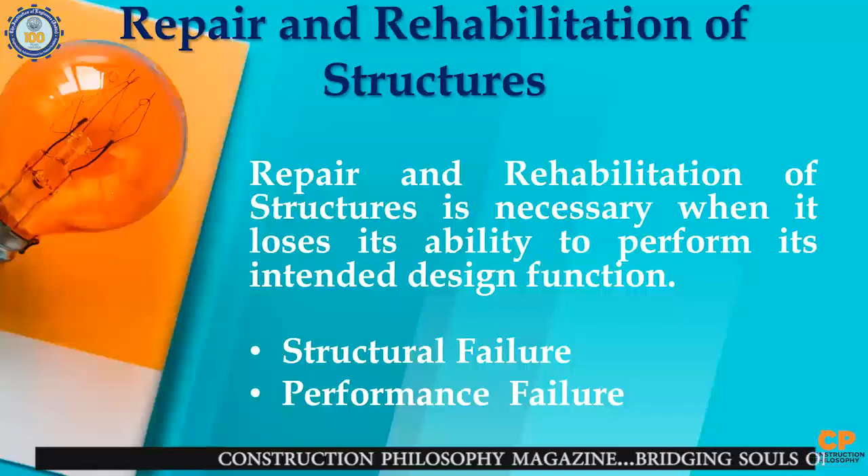Now today we are talking about the cases of evaluation of distress and remedies. These are very small things, but small things make a big difference in the real field of practice. So repair and rehabilitation of structures is necessary when it loses its ability to perform its intended design function. There are two major aspects which happen: one is structural failure, and second is performance failure.

What are the reasons which contribute to these failures? One, externally applied load. Your building might have been designed for a particular purpose, maybe a residential area, and later it will be converted into a storage space. So it is an externally applied load which is not taken into consideration. Then environmental loads: earthquake, wind, and other things.

Accidents like the case yesterday where the blast was talked about, the blast of an LNG, was explained by Surya Prakash yesterday. Accidents do happen. Error in design and detailing also adds to a major aspect, because at certain times we have a lot of factor of safety, which is why we need a proper system of checking or peer review, which has to come into practice, but is not there in our country in general.

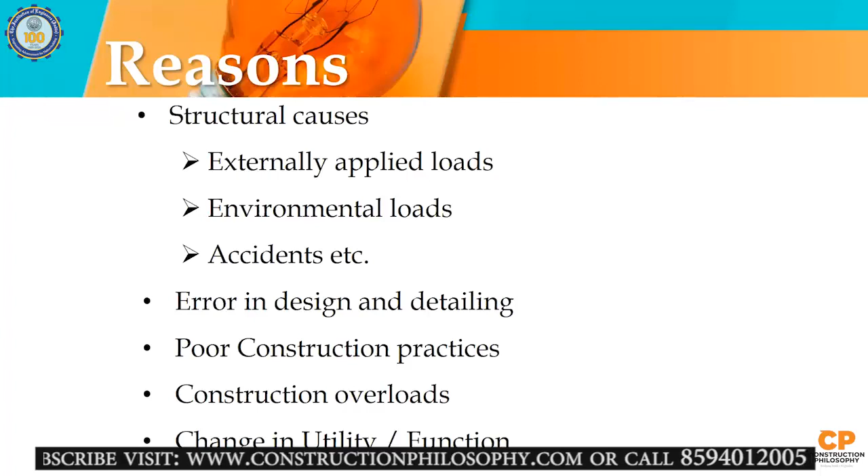That is where yesterday Surya Prakash was pointing out the need of having the Professional Engineers Bill in the parliament, and engineers should be made accountable for the work they are doing. Then there is poor construction practices and construction overloads, which I was talking about, and change in utility of function. So these are the reasons which lead to the distresses happening in structures.

So a structure needs to achieve its required strength so that it can be put into service without compromising its safety and utility.

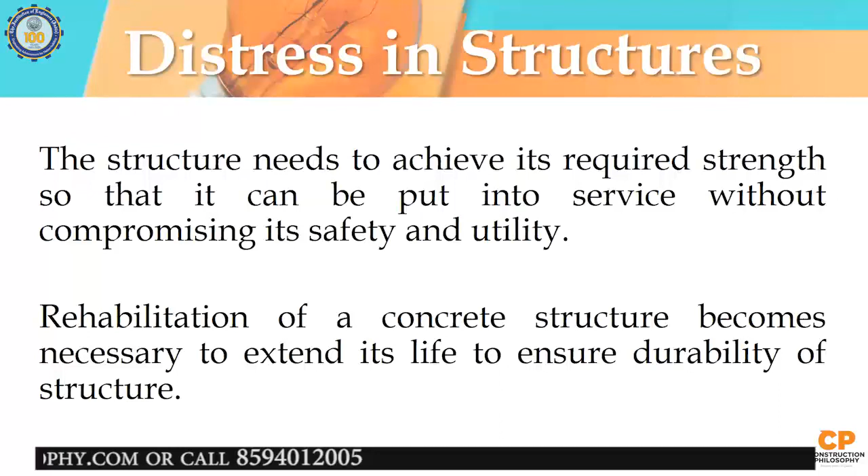Rehabilitation of a concrete structure becomes necessary to extend its life to ensure durability of the structure. Now, how do we understand that a building is easy to notice collapse of the structure in certain cases, like what happened in the auditorium which Suresh was talking about, non-occurring of required strength of structural elements, etc. So these are the reasons which lead to distress of the structures.

And how do we analytically evaluate a distressed structure? These are the steps to evaluate and rehabilitate the distress in a building. First, physical inspection of the damaged structure has to be done, presentation and documenting the damage, collection of samples and carrying out tests both in situ and in the lab, studying the documents including the structural aspects, estimation of loads acting on the structure.

Estimation of environmental effects including soil structure interaction. Then we have to diagnose the reason, find out the root cause, and take preventive steps not to cause further damage. Then retrospective analysis to get the diagnosis confirmed, assessment of structural adequacy, estimation of future use, and remedial measures necessary to strengthen and repair the structure.

Post repair evaluation through testing - yes, testing has to be done after evaluation. Load test to study the behavior, then choice of course of action for the restoration of structure. So these are the step-by-step process when there is a problem which is happening or which is likely to come up in your project. This is the way you have to take the step-by-step process.

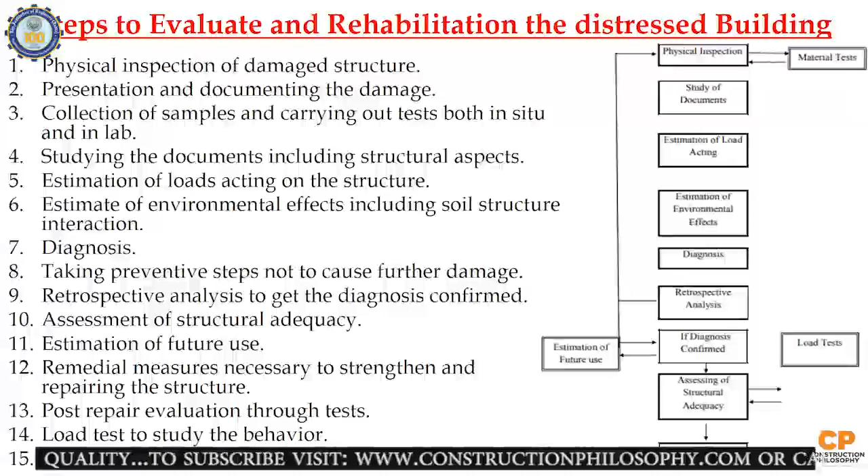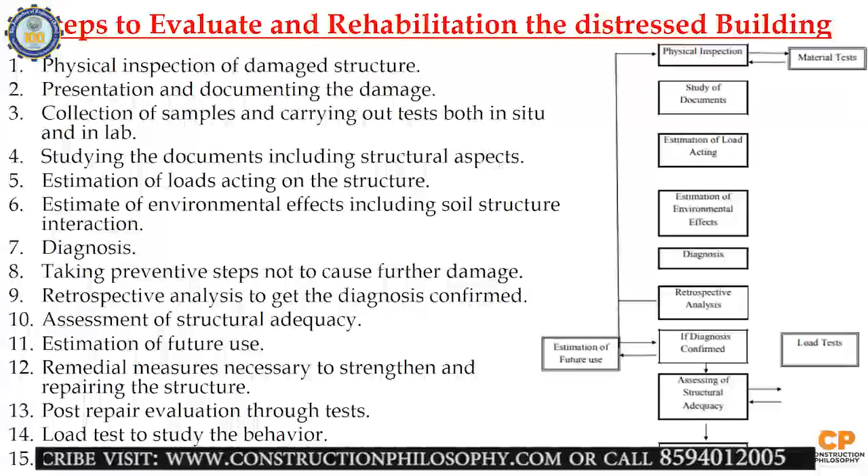There is a flow chart also shown on the other side: physical inspection, study of material test, study of document, estimation of load acting, estimation of environmental factors, diagnosis, retrospective analysis. If diagnosis confirmed, estimation of future use, assessment of structural adequacy, load test, and choice of course of action. So that is the different procedure which we adopt to find out the systematic approach.

And documentation is a big important step which generally we lack. That is very essential, and it is very essential for the government authority also to keep necessary documentation with them, so that in the eventuality something happens to a building - and generally it happens after many years of its construction - there should be some dependable document they can rely upon to make sure the problem is identified and correction is made. It is more important because the safety of public is in question. So our system has to improve to reach up to that level.

So today I am talking about 3 cases which I told: one is the IT building at Kakkanad, a hotel building at Kottayam, and a flyover at Cochin.

The reward for being a good problem solver is to be heaped with more and more difficult problems to solve. This is by Buckminster Fuller, and it's a very important thing. And again, it becomes a passion in you.

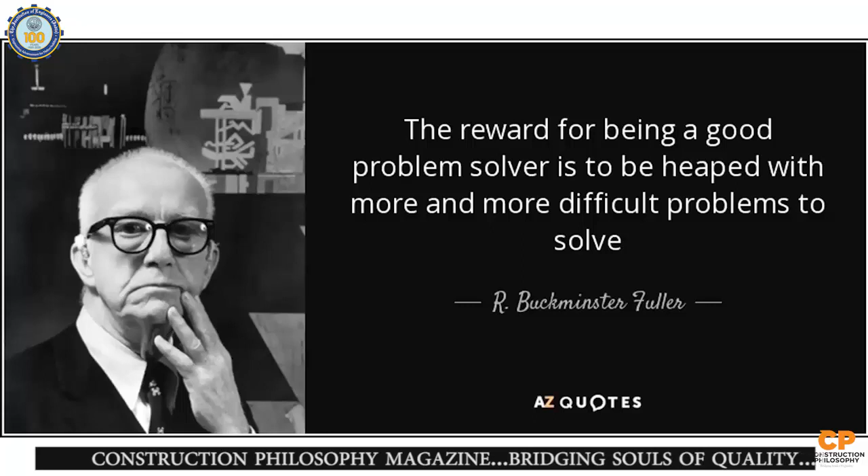Then you jump into the problem to understand what has gone wrong. So a good engineer should have the engineering skill and the curiosity in him to understand what went wrong, or how it can be attained, and how our knowledge can be put into practice.

So this case one which I was talking about comprises an IT building, basement plus ground plus 19 floor building. And ground floor - these are the details, what are the floor heights, which I'm not talking about. My problem was that the cube strength value for the 28th day compressive strength for 19 columns in my ground floor and first floor level needed M45 grade concrete, because this is a huge building with column spans of 10 meter by 10 meter interval. And since the grade of concrete designed was M45 grade, it was not achieving the required strength.

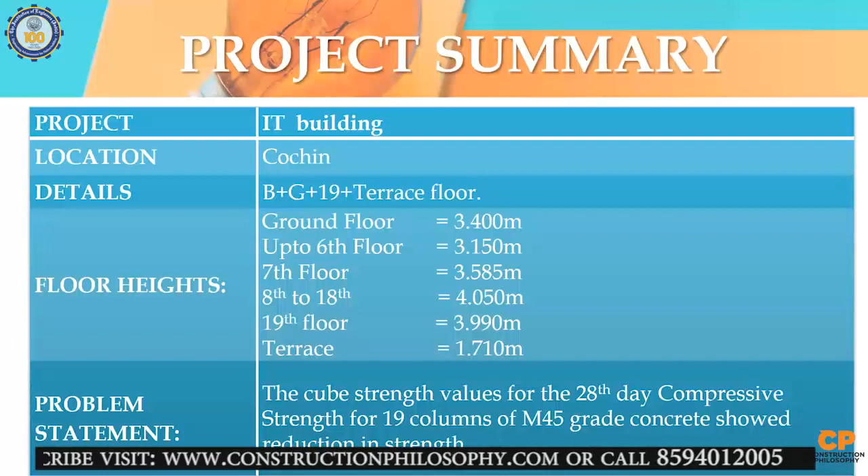Quite a normal problem which many of you generally get in your day-to-day practice, or somebody connected to the site will know this sort of issue generally does come. So what do you do generally for that? This is the project which is completed and functioning now.

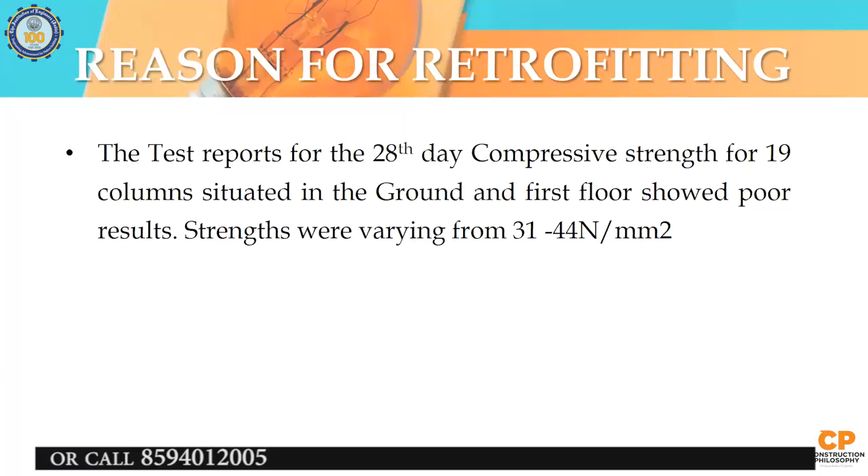My strengths were going for the 19 columns in the range of the cube strength. So how do we take the cube strength? We take cubes during the concreting and work out the 3-day strength, 7-day strength and 28-day strength. Certain times we skip the 3-day strength and go for 7 days and 28 days strength, and it has to be more than what is required, but here it was not coming. So what should we do for that? We decided maybe something had gone wrong with the cube making, and cube making is also a very important essential thing.

Many site engineers make sure that your cement will be best, your sand will be best, metal, everything including the water is the best possible, but your mixing procedure is a very important aspect. Again, you might have a very good concrete team who is doing the job perfectly, but the man who is taking the cube, if he doesn't know how to take the cube properly, we end up with a big problem.

That needs to be attended to. One thing we generally lack is good concrete engineers in the industry. We are always struggling with the grade of concrete, starting in the initial phase of the career to get M20 from M15, then M25, M30, and within 1996-97 we started going to M30, M35, then moved to M40. M40 was stuck there for quite a long time, and now we moved into 45, 50, 55, 60, and currently in Cochin we are doing a couple of projects at M60 grade concrete. Still we are able to achieve up to M80 grade concrete.

Whereas if you go abroad, people are using 100 grade concrete, 120 grade concrete. Why? As the compressive strength capacity increases, your size of column can be reduced, your steel can be reduced, economy can be achieved. So now there is a lot of technology which brings in high strength concrete. That's a totally different topic which I am not going to touch upon today, but I am worried about what is going wrong in our concrete at site, and if something goes wrong, how to manage that.

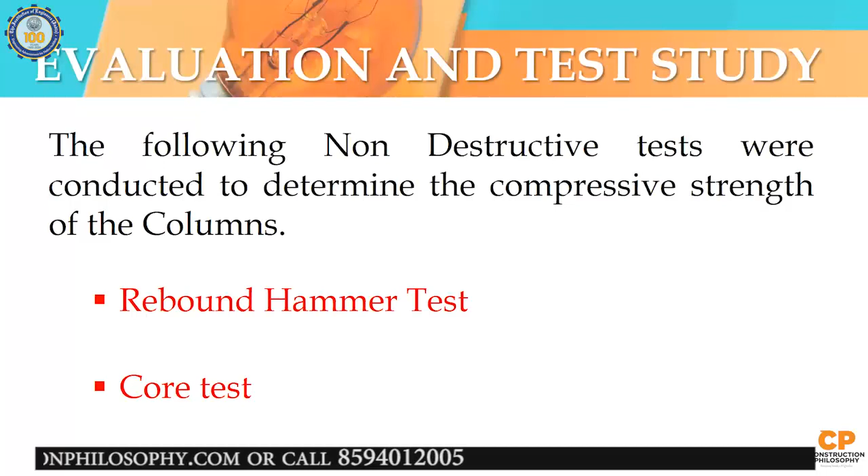So the following non-destructive tests were conducted to determine the compressive strength of the column. We went for rebound hammer test, and to confirm the values we went for core testing. It was a very critical project, the loads were important, so we didn't want to take chances. This was the non-destructive test which was carried out.

Rebound hammer test conducted on RCC column showed that the estimated strength of the concrete in the RCC column member, after necessary correction, is varying in the range of 31 to 44 Newton per mm square.

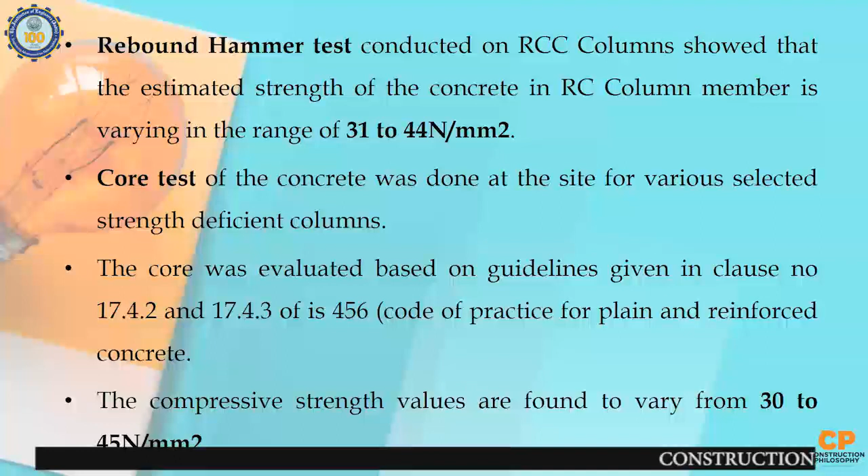Again we went for core testing. Core testing is something which, if you are getting it done, be very careful because it is very essential that the core is taken properly. Core test of the concrete was done at the site for various selected strength deficient columns, and the core was evaluated based on the guidelines given in the clause of IS 456, and compressive strength values are found to vary from 30 to 45 Newton per mm square.

So we have a problem there, and how to go about strengthening the column - what can be the reason? A lot of study, a lot of arguments on how to find out, and I should remind you that the project was executed by one of the biggest contractors in India, and the quality control was done by an internationally acclaimed PMC.

So again, low quality aggregate for concrete was suspected. Fly ash based cement - the type of cement was changed, and the testing was redone. Low quality of workmanship, every point including the point where the loading was happening, was checked and cross-verified. Nominal size of aggregate mismatched with that of mix design at the time of casting - that was also cross-verified.

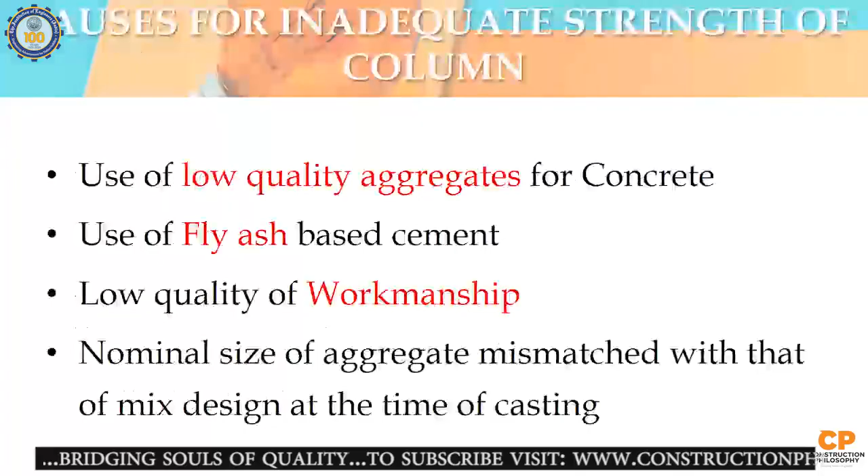And there we had to come up with a solution. So all these trial and error tests were done. We were trying to get the batching done, and trial cubes were made, but we were not able to come out of the problem. Now, what are the solutions possible?

One, demolition of the columns which have not attained the required strength and recast the member wherever possible. But unfortunately, by the time the 28 days strength comes in, your building has gone up another 2 or 3 floors in height. So there is a problem - by the time you come to a decision, there is already a loading on top of that.

Then you can retrofit using carbon wrapping, or there are n number of systems available - steel bonding, plate bonding, etc., and go for column jacketing. Since in many cases, especially on big projects, as a structural engineer, I insist on demolishing the column, because once you get the column demolished, especially if it is a main contractor, he will be careful throughout the remaining part of the project. If you allow them to do some quick solutions, then it will be a big problem later on.

I have experience on very tall buildings, say 30 to 35 floor buildings, where we made sure that the column is dismantled even if there is a considerable degree of damage or honeycombing. We generally won't allow them to get away with pressure grouting or carbon wrapping or other things. But on the upper floors, where it is difficult to get done and the loss of strength is not very critical, sometimes we go for retrofitting using carbon wrapping.

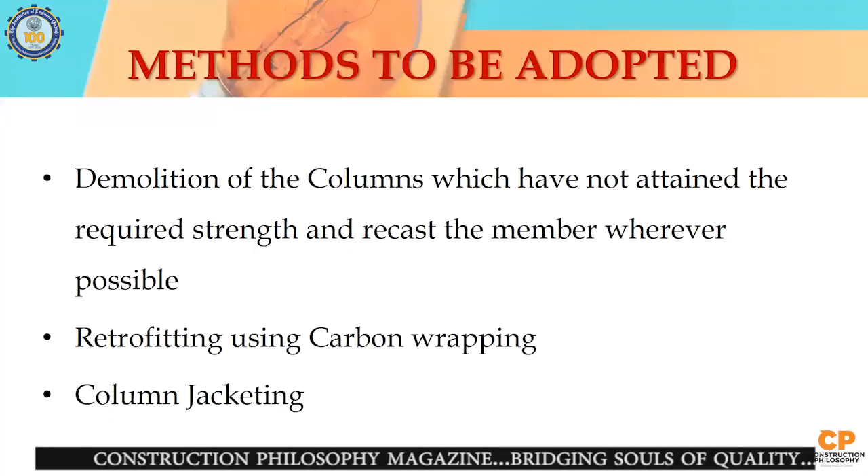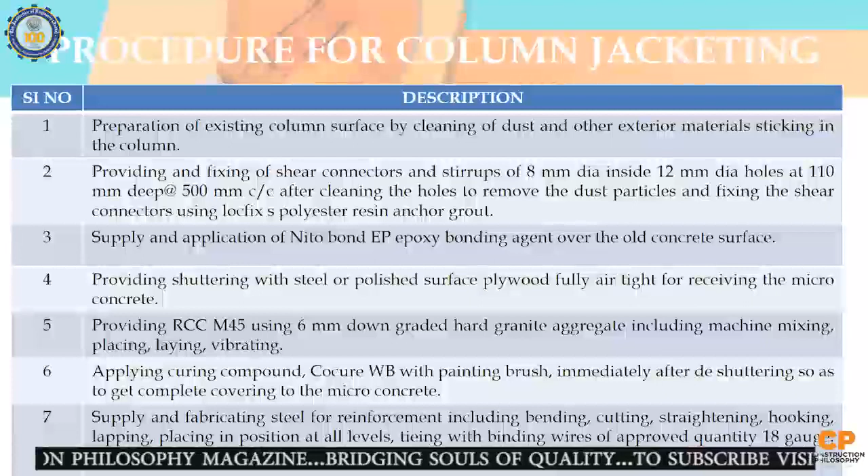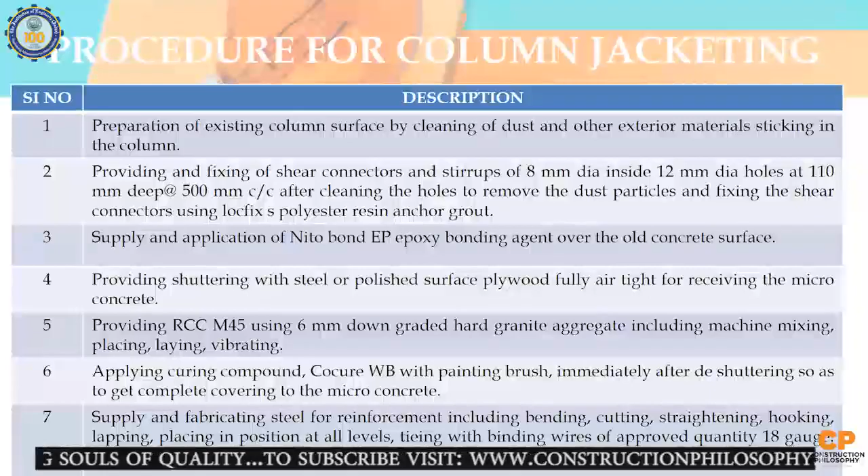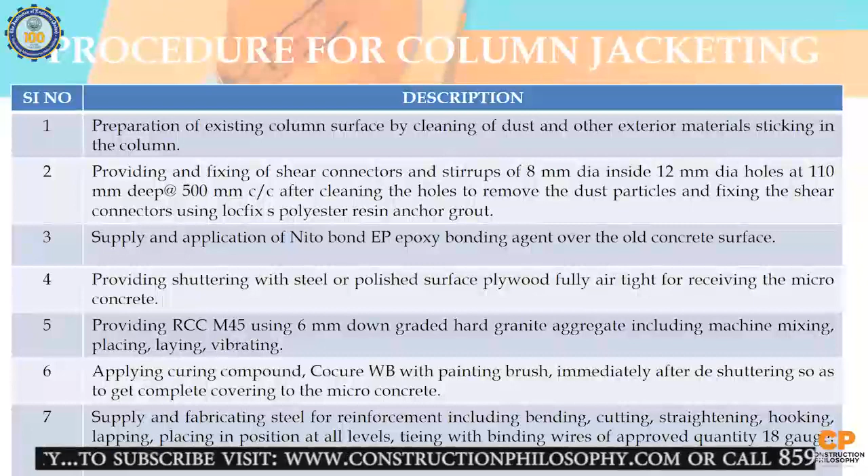These were the procedures adopted for column jacketing: preparation of the existing column surface by cleaning dust and exterior material sticking to it; providing and fixing shear connectors and stirrups of 8mm dia inside 12mm dia holes, 110mm deep, at 500mm center to center, after cleaning the holes to remove dust particles and fixing the shear connector using Locfix polyester resin anchor grout; supply and application of Nitobond EP epoxy bonding agent so that old and new concrete get bonded with each other; providing shuttering with steel or polished surface; providing RCC M45 using 6mm down graded hard granite aggregate including machine mixing, placing, laying, vibrating, applying curing compound, and supply and fabrication of steel reinforcement.

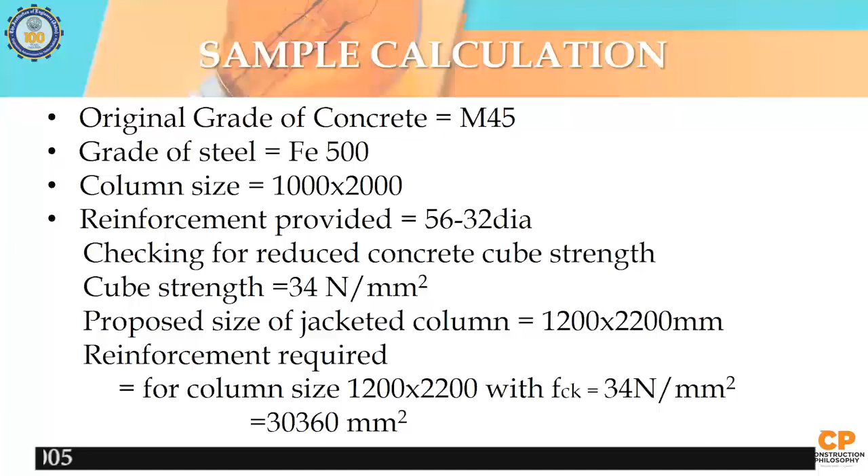We increased the size of the column to 1200 by 2200, with additional reinforcement for column jacketing. A mix design without fly ash was adopted and fresh design mix was done. The cement brand was also changed.

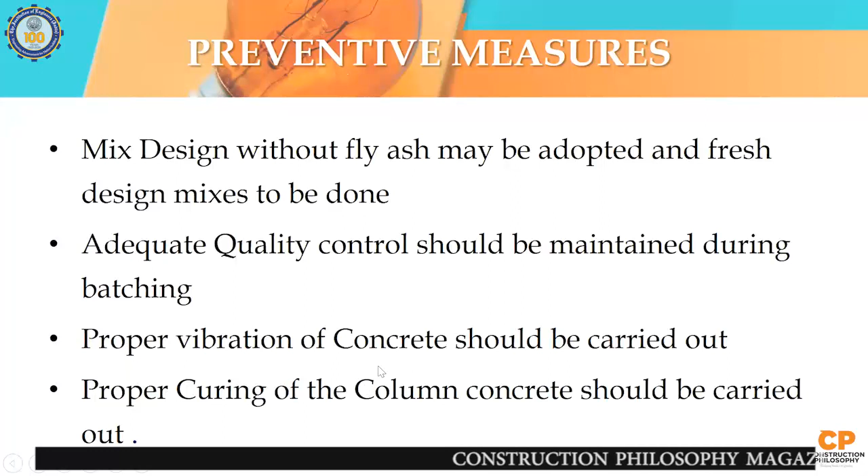A quality control team of experts - we brought in about 3 to 4 concrete experts to work out the real problem. Vibration of concrete was suspected, curing of the column was suspected, and finally after detailed evaluation and study, we found that the M-sand used had lesser aggregate and poor quality, which led to all this problem.

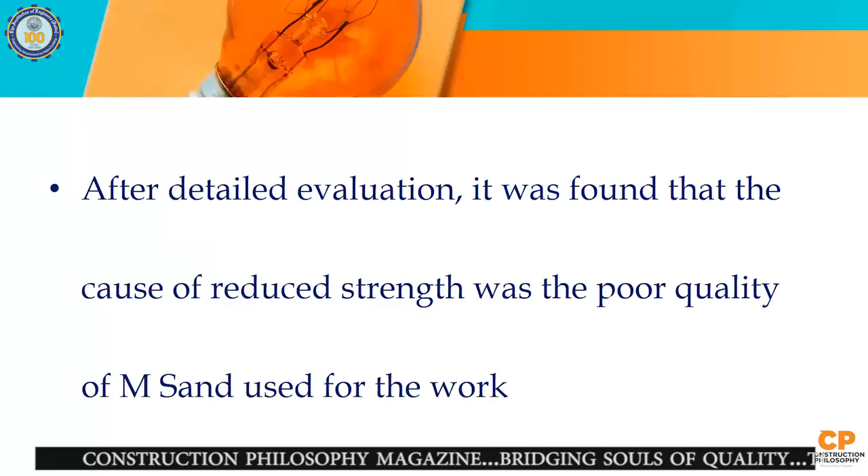We spent so much money and energy on this, so it's very important that the sourcing of material has considerable effect, especially now when we are using M-sand instead of river sand, which is a necessity nowadays due to non-availability. Make sure it is properly brought in and studied to confirm it meets required standards. That's how we finally got it done and the project was completed after the necessary jacketing.

It is better to solve the right problem approximately than to solve the wrong problem exactly.

Now this is a hotel building at Kottayam. Again, 2 blocks with an expansion joint in between. It's a G+2 floor building, only 9.45 meters, with 32 rooms and 14 car parks.

The building was constructed, and we were the structural designers. We designed the building with piling, and the pile resting on rock was given in the drawing. After 2 to 3 years of construction, cracks were observed in the building.

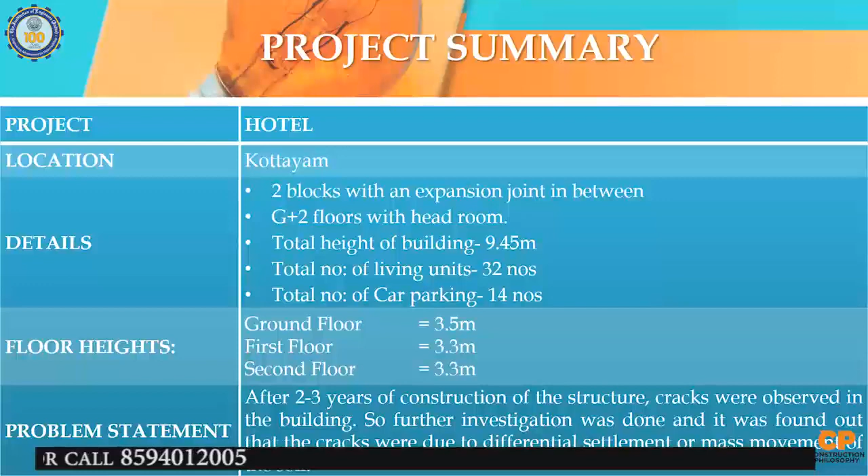Further investigation found that the cracks were due to settlement or mass movement of the soil, because this particular property had an empty plot in the neighboring area. Mass movement of soil beneath the pile foundation was observed as shown below. The settlement of the front block was observed to be more than the settlement of the back block, which resulted in the generation of the crack.

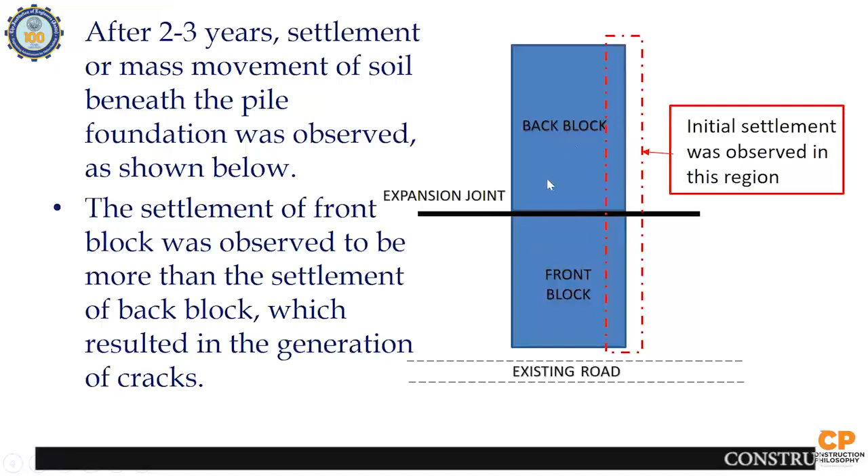We found that the material was moving from this side to the neighboring plot, which was at a lower level. The topsoil comprised very soft clay, going into a bit of laterite strata, and then into the rock.

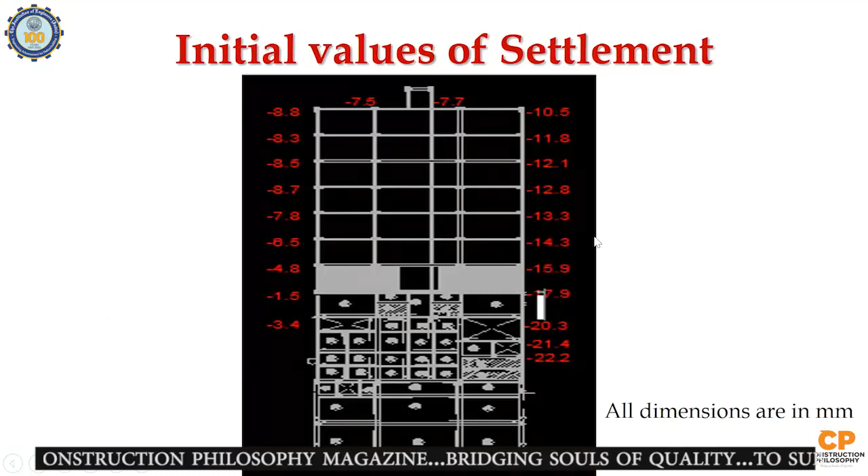So when we evaluated what went wrong, the work was given to the contractor who was quoted the lowest, and it was his first experience as a piling contractor. The supervisor was also having his first project. So the quality of piling went bad, even though the design was perfect, and the rock anchoring had not happened. They had just touched the rock layer, or at certain times it didn't even reach the rock, and that led to settlement, and the horizontal soil movement also aggravated the problem.

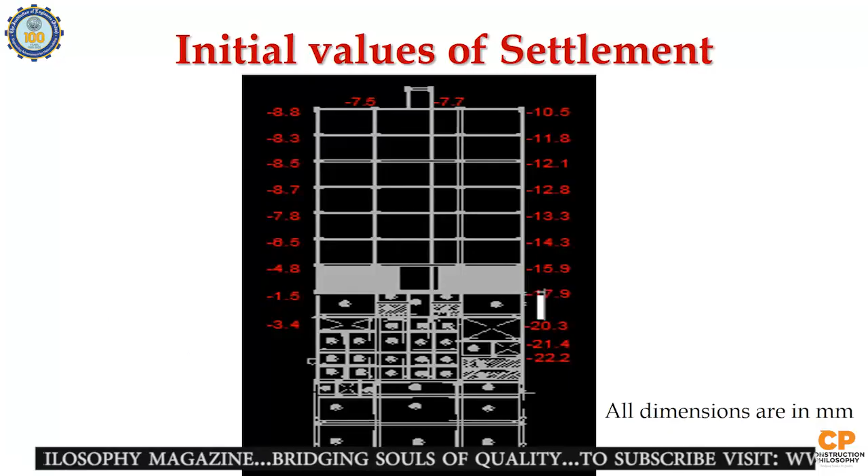Here you can see the settlement pattern which was happening. We found that if it was left as it is, it would be a problem. So the existing building was supported with props, and whatever was needed was demolished. To avoid movement of soil, touch piles and Casuarina poles were provided along the length of the building where movement was expected, so the entire area was supported to control the lateral movement of the soil. Also, underpinning of two piles on the same side was done. After underpinning, the settlement was found to be within limits and the building was stable. So this was the underpinning.

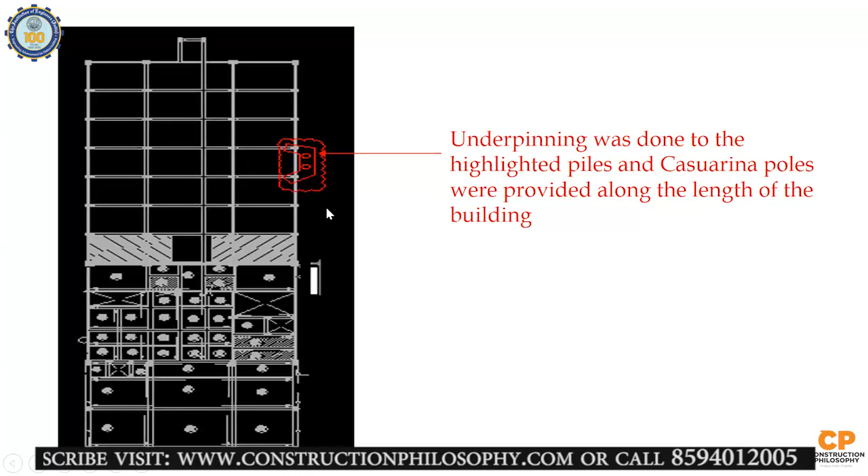This building was constructed in 2006, and this underpinning was done around 2009. Underpinning was done to the highlighted piles, and Casuarina poles were provided along the length of the building to prevent soil movement. After 4 to 5 years, they changed the structural use and demolished a certain area in the center to create a connection in between.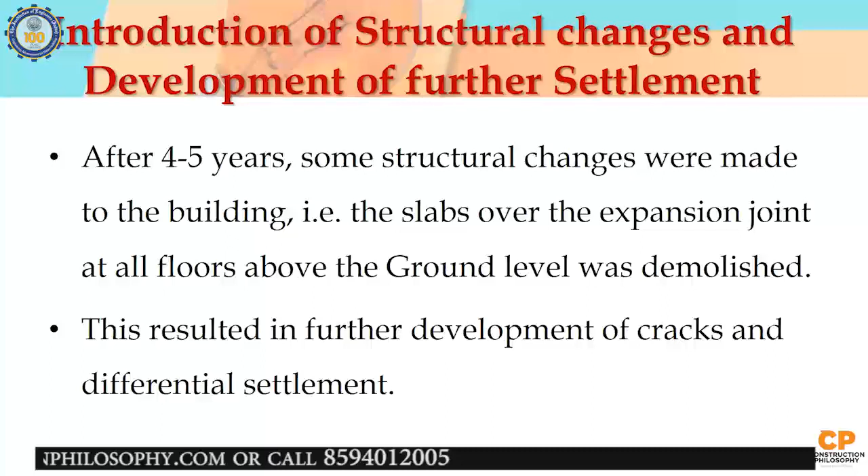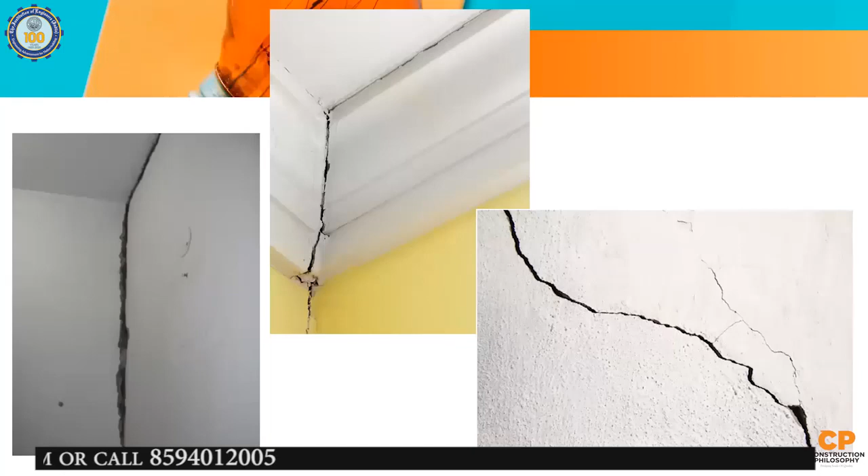Expansion joints were broken and reconstructed for introducing a lift, and suddenly the building started cracking heavily. Once that equilibrium was disturbed, cracks were formed to a large degree. You can see the extent of the cracks - they were quite large, and the entire system cracked very badly. We had to come up with a solution.

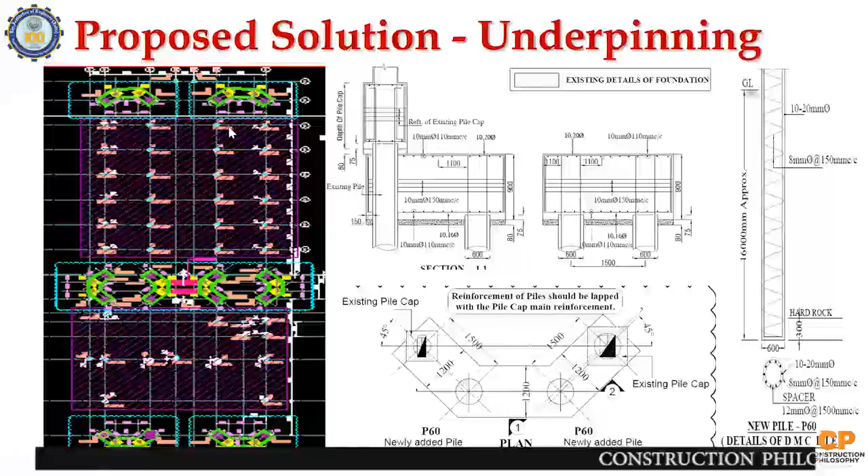So what happened - this was the expansion area, this was the other side, and this was the front side. So what we did was go for underpinning. Previously there was an underpinning and the building was stable, so readings were observed for quite a long period to understand what was happening. We found that the particular area where the structural change had happened was creating the problem.

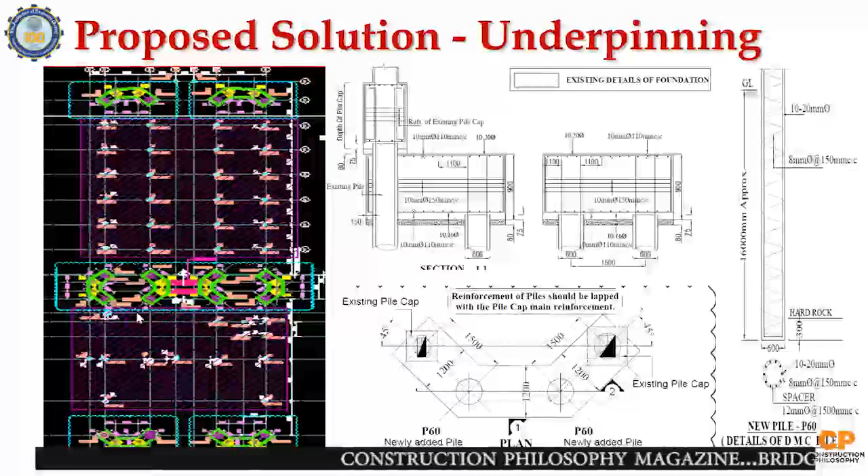There was also a slight movement on this side, and once we strengthened this area, we were afraid there might be some movement on that side also. Finally, after taking readings for 6 to 8 months, it was decided that we go for underpinning by cutting this area. We would do the underpinning in this area to stabilize whatever disturbance had happened, and also strengthen this side as well as that side, because once the building is functional and completed, it is very difficult to do any work in the center.

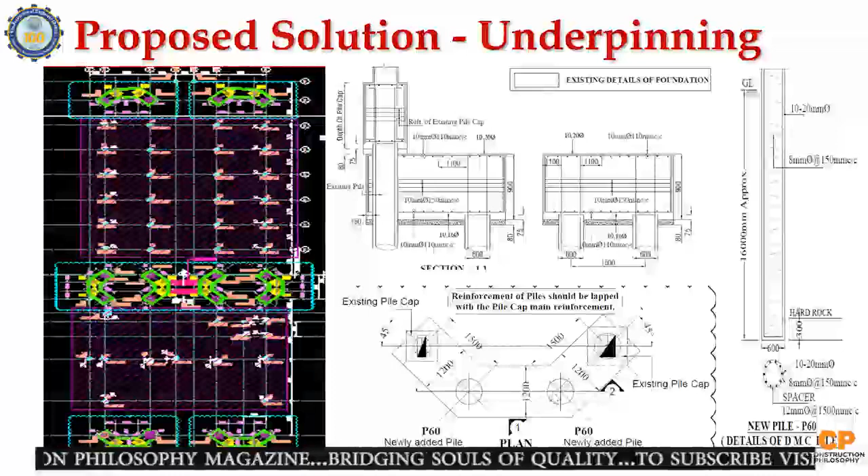Here you can see the drawings - these are the existing piles, and these were the additional piles provided, connected to the pile cap, interlinked and hooked into this. Here you can see this goes up to 16 meters and is properly embedded into the hard rock, and the reinforcement was provided accordingly to take care of the loading.

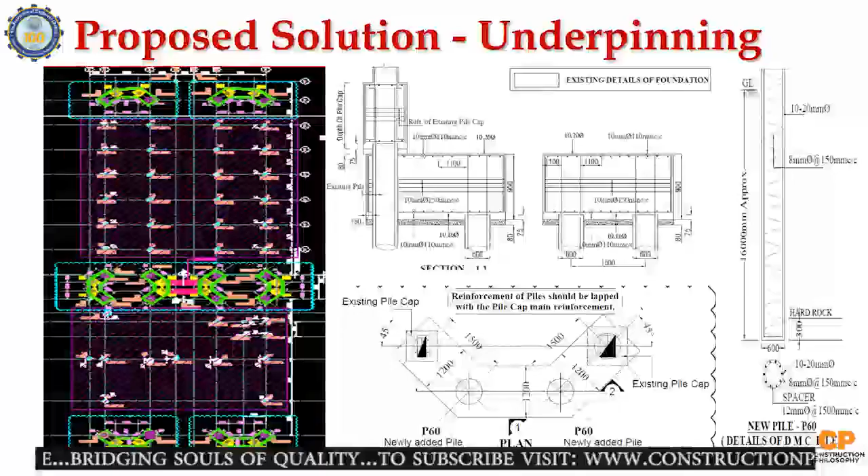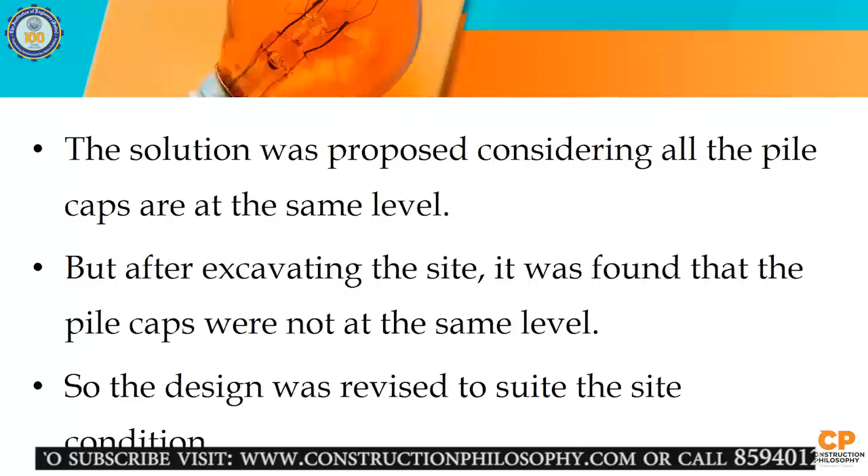The solution was proposed considering all the pile caps were at the same level, but after excavating the site, it was found that the pile caps were not at the same level, so the design was revised to suit the site condition. This is where I always point out the concept of being dynamic - your solution might not be exact on the drawing board at the office, you have to go to the site and modify it accordingly. So the design was revised to suit the site condition.

Every problem has in it the seeds of its own solution. If you don't have any problem, you don't get any seeds. So you have to work out and find what the solution is.

Total station survey for measuring the current level of settlement was noted. Propping was done, piling operation was carried out, ready-mix concrete of grade M30 was used, pile cap construction was done. Self-compacting concrete - generally when it is difficult underneath a foundation, we go for self-compacting concrete - of grade M30 was used. Grouting was used for fixing grouting steel. Column jacketing was done - 3 columns near the expansion joint where excessive cracks were present were jacketed for strengthening, and the disconnected area was done with decking sheeting on top.

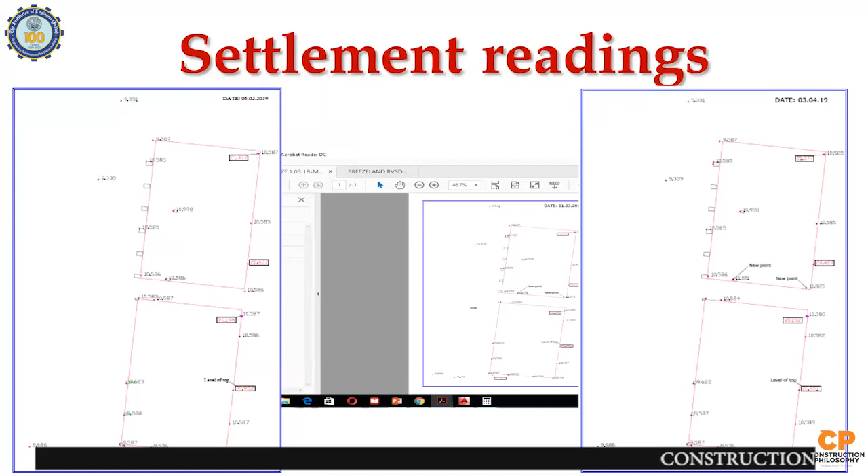Within this we made an innovative piling rig in this area so that it's only less than 3 meter height. After cutting the slab, we brought it inside and were able to drill and reach up to the rock. And here the concreting which is going on.

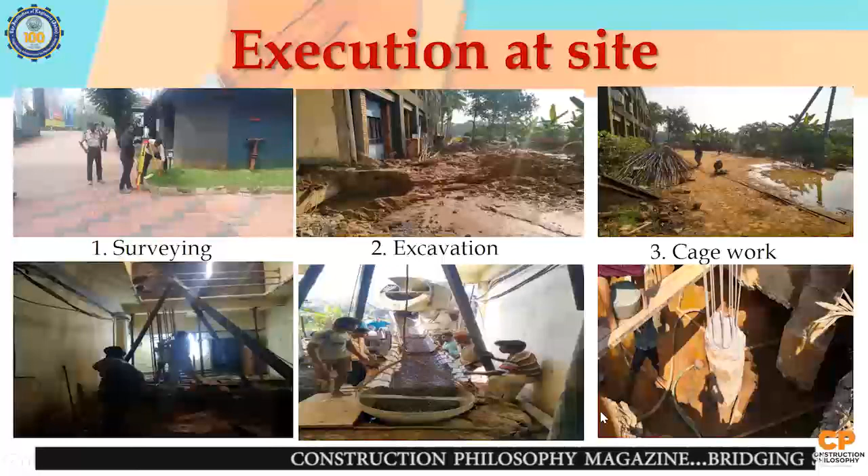After the piling work, the pile chipping work is happening. And here is the excavation for the pile and the pile cap, the steel work getting anchored here. This is the form work being done, and here it is that concreting using the self-compacting concrete.

The load of this column has been taken up by this pile cap and now will be bypassed through the new additional pile, and whatever settlement occurs will be controlled based on that. The tie-beams fitting together, and the backfilling is being done. So here you can see the column jacketing happening.

So this is the shear connectors which is being provided, and this is the decking sheeting system connecting the removed portion so that it is connected together.

So whenever there is a problem, initial investigation should be done to check how critical the damage is. And if you have the solution and the data, don't wait for time to pass, especially when you are dealing with consolidation of the soil or lateral movement of the soil, because the damages will keep on increasing. Immediate rectification measures need to be taken as required. This is necessary to arrest the deterioration of the structure.

Damages in structures should be identified correctly, and the cause of the damages needs to be determined. Initial investigation should be done to check how critical the damage is. Immediate rectification measures need to be taken as required.

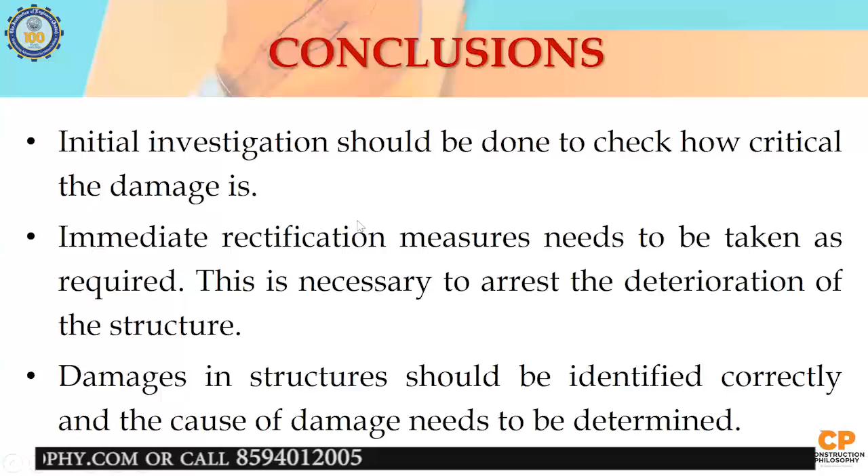So tests are conducted depending on the observed failure. It's very important to continuously monitor as well as continuously test to make sure that things are in place. From the test results, a decision has to be made whether to demolish or adopt strengthening methods to resolve the issue. Accordingly, the structure may be redesigned considering the expected loads.

So the building was completed in 2016. Readings were taken until the last 2 months, and everything is stable and functioning. The last floor is also made operational now after the necessary rectification.

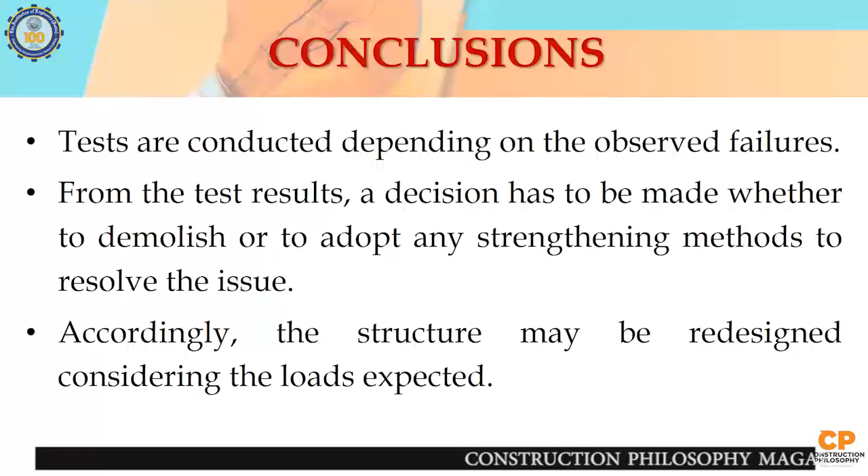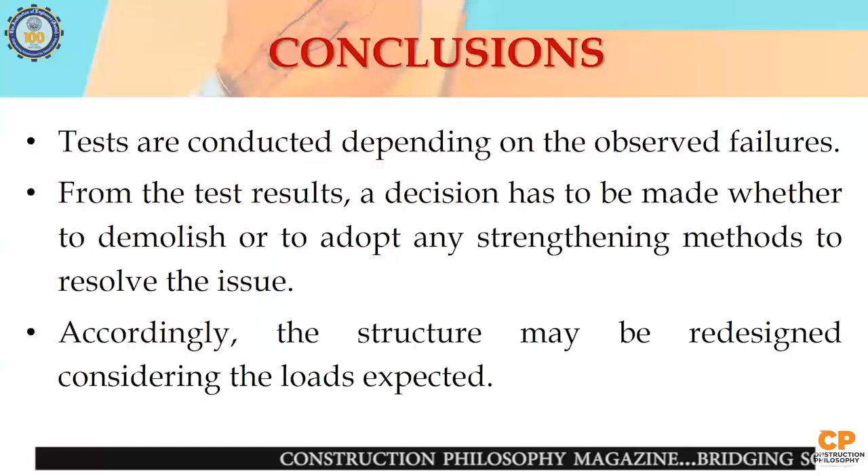So this was one case study where a problem of settlement was corrected, where the building was going down over the years. It was observed, monitored, and found out, because there has to be a practical solution—at times it's very difficult to find out how to solve it, because the building is existing. So you have to observe and come up with a remedy so it will be solved for a long duration of time.

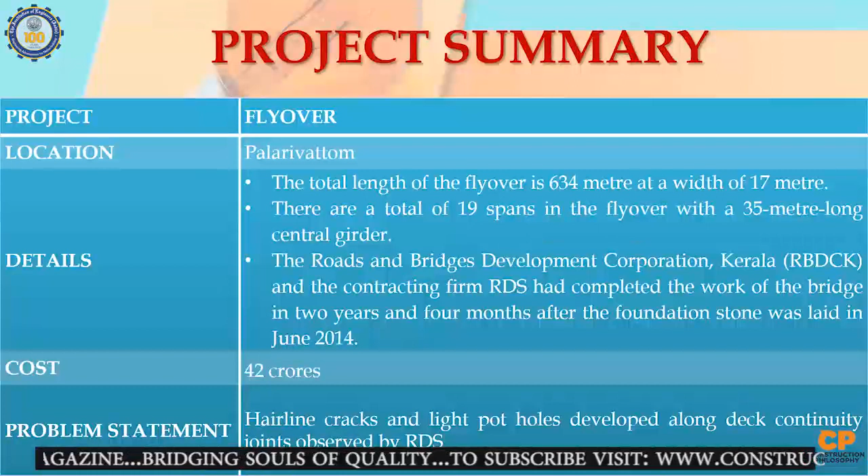So this is the Palarivattom flyover, the third case which I would like to discuss today—a controversial topic. For those who don't know about this, let me tell you: Palarivattom flyover is a flyover constructed on the NH bypass in Cochin, with a total length of 634 meters at a width of 17 meters. There are a total of 19 spans in the flyover with a 35 meter long pre-stressed center girder.

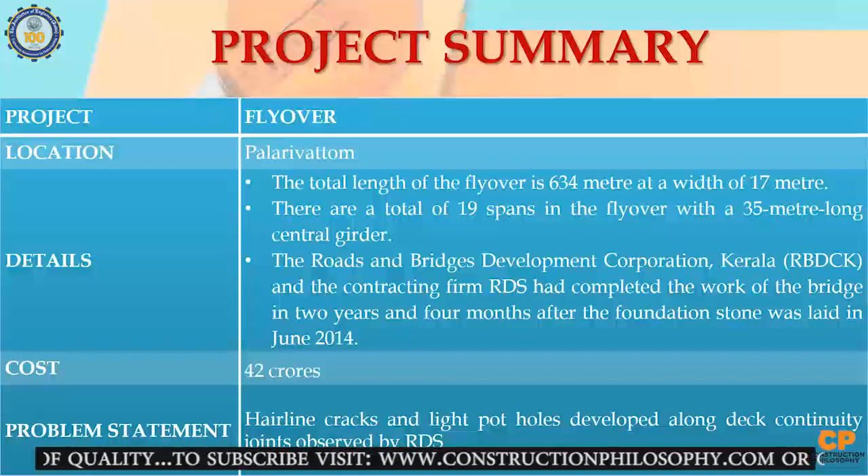The others are cast in situ girders. The Roads and Bridges Development Corporation of Kerala (RBDCK) and the contractor firm RDS completed the work of the bridge in 2 years and 4 months after the foundation stone was laid in June 2014. The approximate cost of the project was 42 crores.

And the problem was that hairline cracks and light potholes developed along the continuity joints, observed immediately after 2 months of operation. So that was the problem which was there.

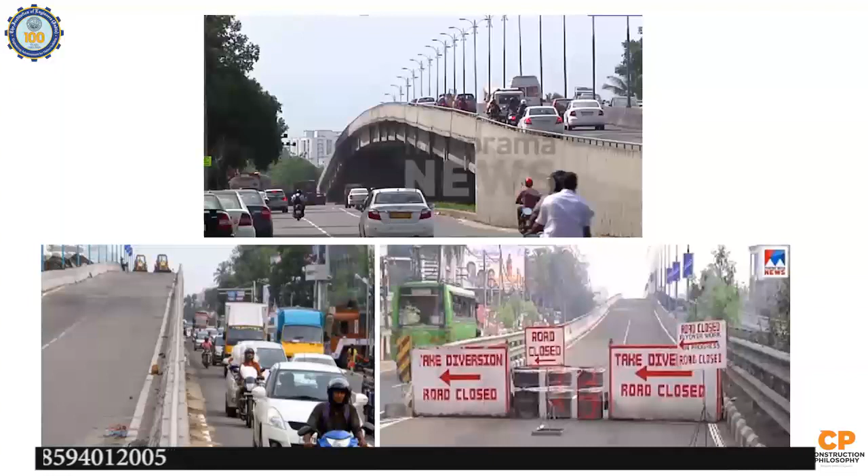They found that the cracks are increasing, so they asked to do a load test and asked to immediately close the bridge for rectification of what is needed. So this is that story.

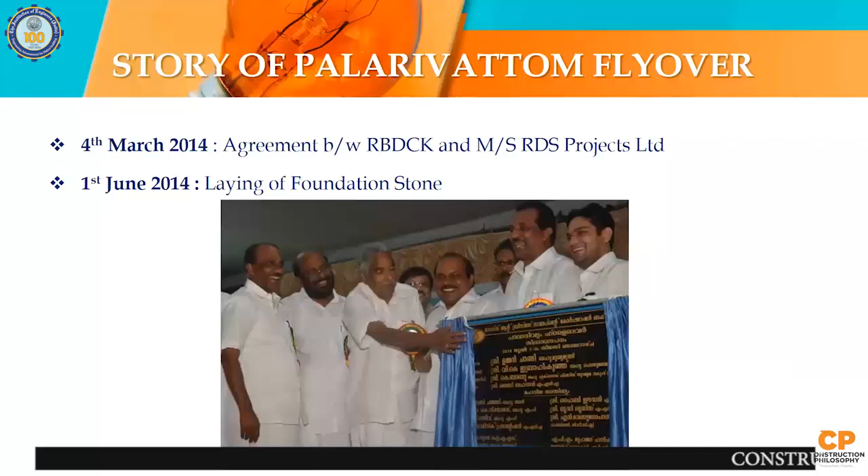Agreement between RBDCK and RDS, the contractors, was done on 4th March 2014. On 1st June 14, the foundation stone laying was completed, and here the works which are going on. So that is the extension of the road.

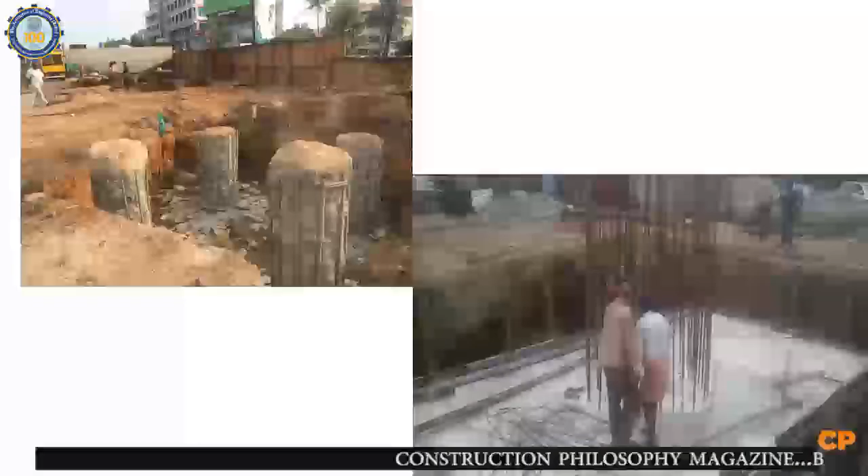Here is the pile cap. Piles were carried out, going to the rock strata, and here is the pile cap, and the pier is being constructed. This is the pile cap and pier.

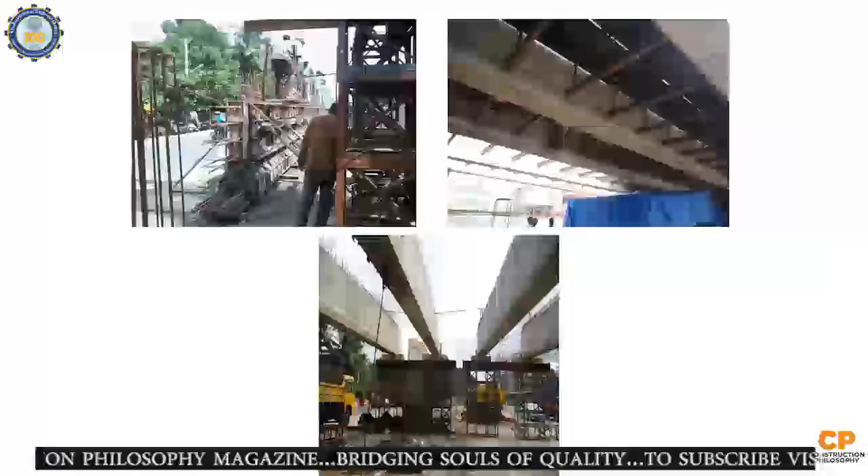This is the slump cone test and the other tests which were taken during the work. So this is the girders which are being placed, girders getting erected, piling photographs. So here is the work which is going on - casting of the retaining wall, the pedestal, the deck slab.

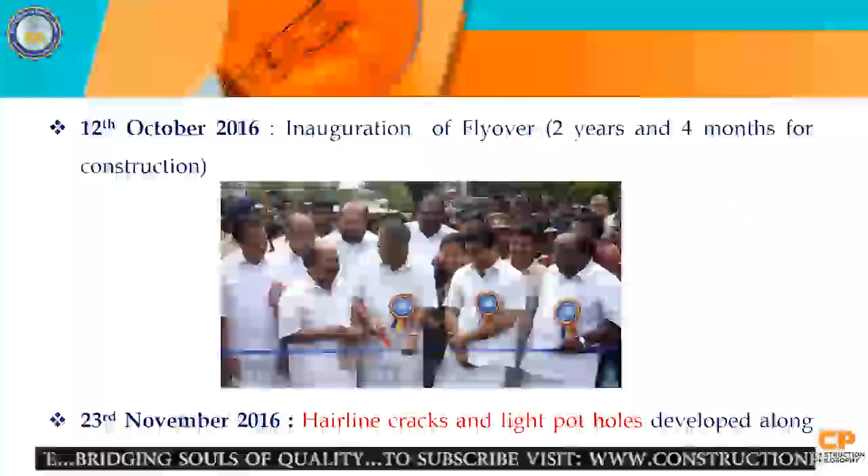The beams, and on 12th October 2016, the flyover was inaugurated. On 23rd November 2016, hairline cracks and light potholes developed along deck continuity joints, and it was reported to KITCO. Proposal of the structural consultant Manjunath for rectifying the cracks was submitted in January 2017.

The methodology was finalized in consultation with Professor Dr. P.K. Aravindan. On 17 February 2018, a 3D FEM analysis was done and a detailed report was submitted by Professor Aravindan for repairing the observed cracks.

The findings were that type 4 bearing and pedestal at P18, and type 2 bearing and pedestal at A2 are damaged due to excessive movements and cracking. The pedestal used was not good enough to take care of the movement, and bearings are not placed as per the drawing.

So this was the repair scheme suggested: remove deck continuity and nearby bearing cord, provide a 25mm wide expansion joint at P18, remove the damaged pedestal and reconstruct it, replace the bearings, propose to remove deck continuity at the specified location, and do pressure grouting to rectify the cracks along with carbon fiber wrapping.

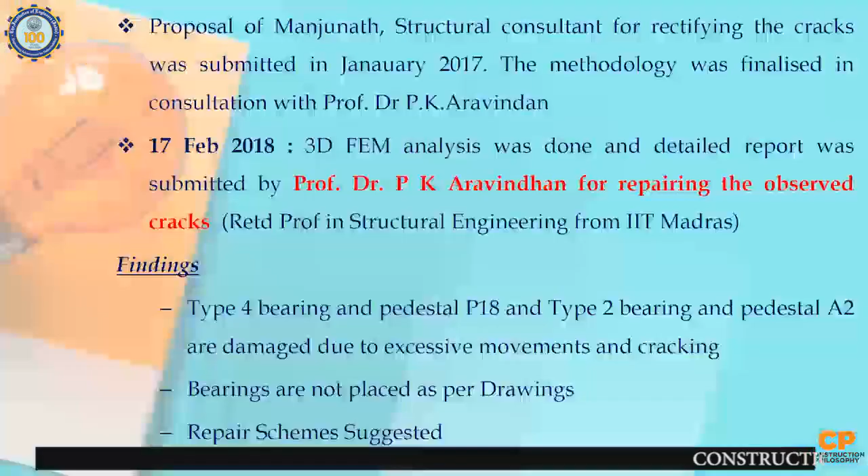So this was what was suggested by Professor P.K. Aravindan way back on 17 February 2018. But since the traffic was going on and vehicles were plying, nobody tried to make the rectification. And that is where I say, whenever there is a problem, you have to act immediately, especially when the structure can deteriorate on further loading.

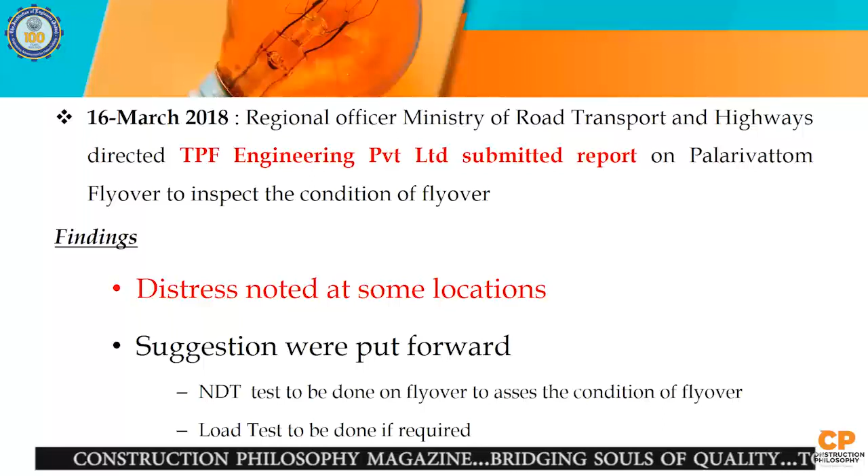On 16th March 2018, the Regional Officer, Ministry of Road Transport and Highways, directed TPF Engineering Private Limited, and they came and inspected and submitted a report on the Palarivattom flyover. They found distress noted at some locations, and they suggested NDT testing to be done on the flyover to assess its condition, and load testing to be done if required.

On 30th July 2018, in a meeting between RDS and RBDCK, even though there was a suggestion given by Professor P.K. Aravindan, RBDCK said that in order to evaluate the detailed design of the structure, evaluate the existing condition, and suggest suitable remedial measures, it was decided to give the job to IIT Chennai. RDS agreed to bear all the expenses as per contractual obligation.

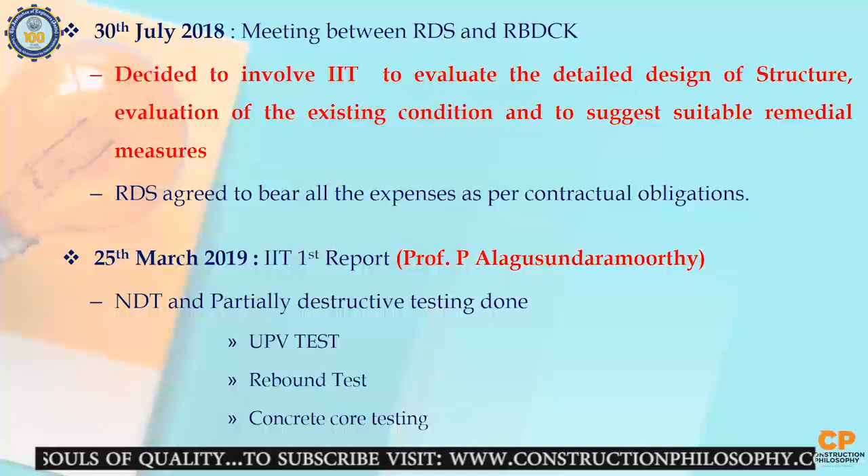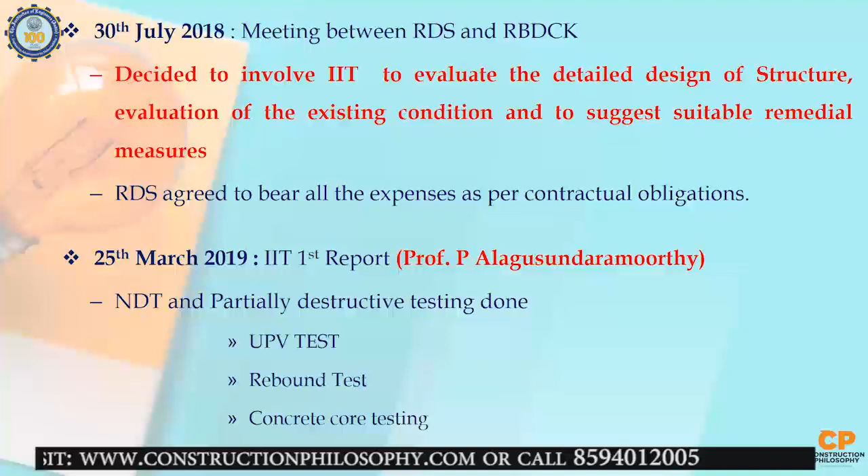IIT conducted tests from July to March 2019. Lots of tests were carried out, and the first report of NDT testing - non-destructive testing and partially destructive testing - were done. Professor P. Alagusundaramoorthy was in charge, and they released the test results, which comprised UPV testing, rebound testing, concrete core testing, and carbonation testing.

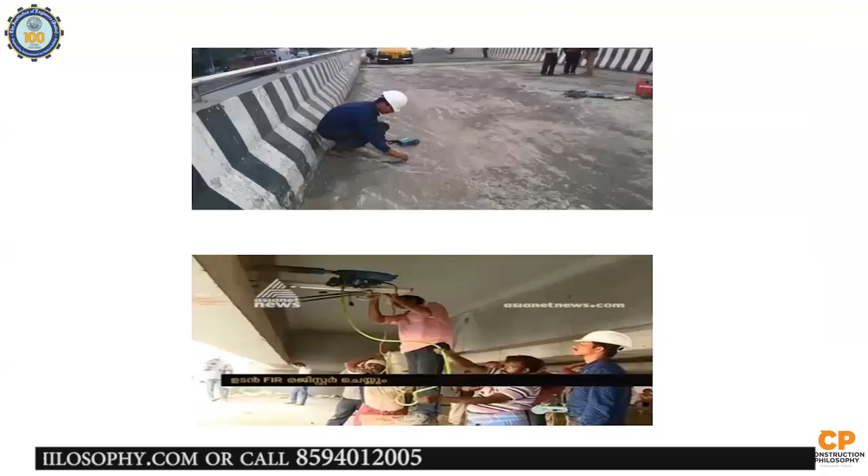So here you can see the testing which is going on - UPV testing, and core samples being taken. You can see how the core was taken horizontally, because it was not possible to do the core sampling from the top. It was taken from the bottom on a platform which was made.

So what were the results or findings from the NDT test results? From the rebound test, they tested at 10,380 points on 13 RC girders, and the measured rebound value was greater than 35 Newton per mm square and ranged up to 80 Newton per mm square. 35 Newton per mm square was the strength for which the reinforced concrete was designed.

They did the UPV test and tested at 5,190 points, and 7% were found to be less than 3 kilometers per second, while 93% of samples were found to be good, with values ranging from 4 to 4.5. If we do a crack mapping, the 7% are found to be in the area where cracks are already present.

The core tests were conducted, and as I told you before, you have to be very careful when doing the core test, because proper sampling retrieval is an issue, and proper covering and curing has to be done, along with proper testing, so that the core represents the actual site condition. 79% were found satisfactory, with a lower strength of M22 and a higher strength of M51 noted. In the carbonation test conducted, no damages were detected. So here you can see the photographs again.

IIT suggested to go for retrofitting using carbon fiber wrapping and grouting using low viscous epoxy resin for grouting. RDS carried out the rectification works mentioned by IIT Madras, where they did the relaying of the bituminous layer, replaced the bearings, and replaced the deck continuity joints with strip seal joints.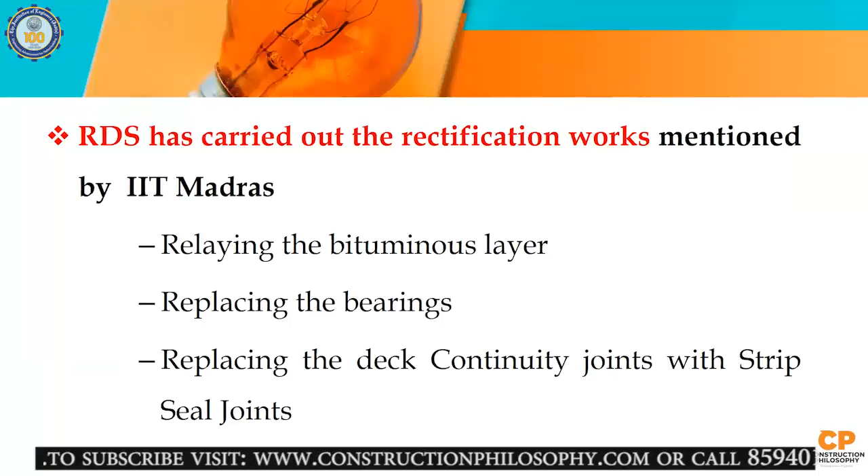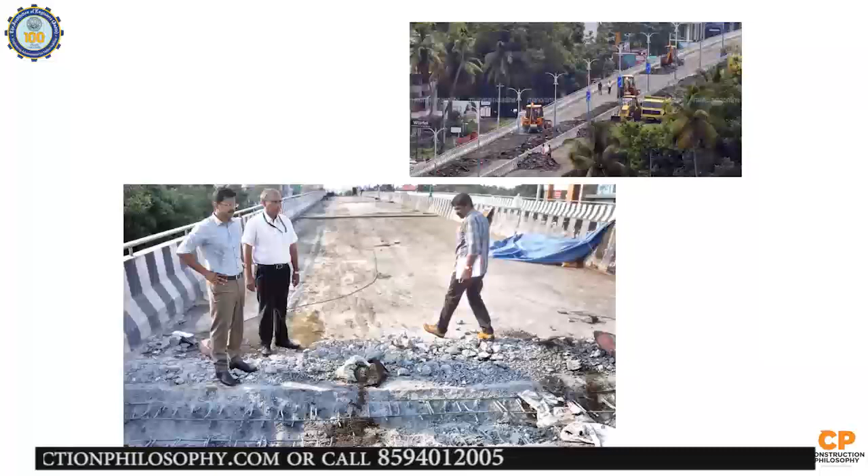Here you can see that the rectification work is happening, breaking the joints. I will tell you the exact problem from the engineering concept, which was the theory of going for deck continuity in order to prevent the expansion joints. They connected the stitch on the top level.

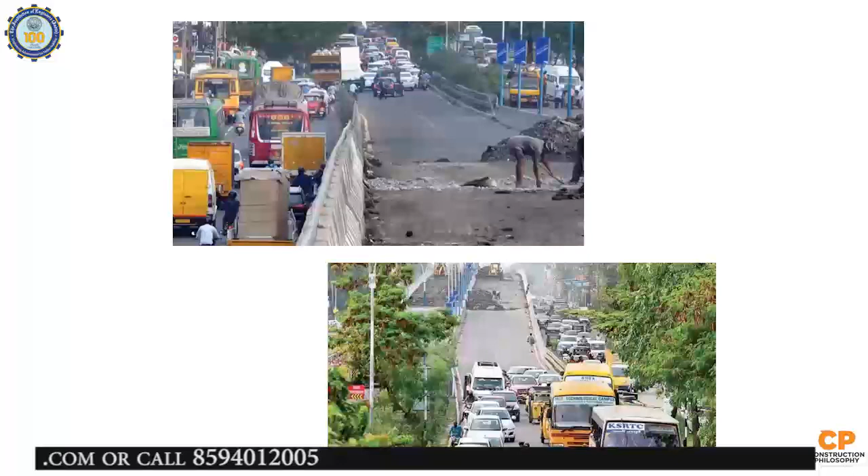I will explain that with the IS code itself. This is where the deck continuity was getting removed and restitched together. So here is the maintenance work going on. Here you can see that particular joint being treated, and here proper expansion gap is again established after breaking the deck continuity.

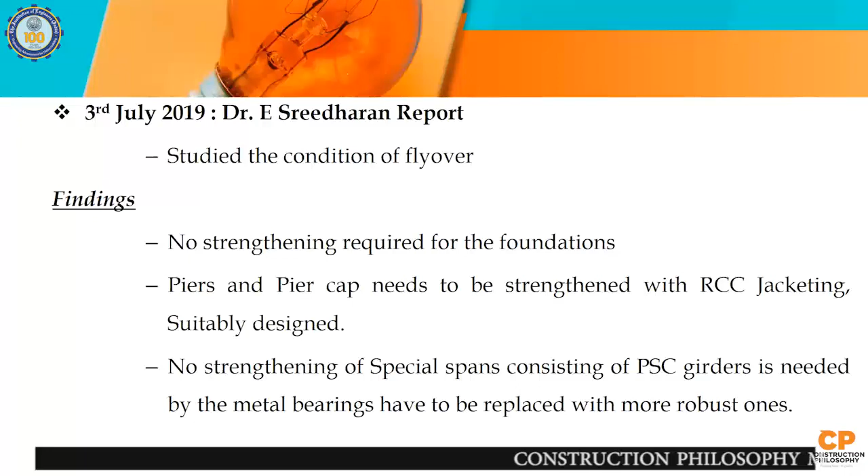That was carried out, and on 3rd July 2019, Dr. E. Sreedharan sir was called in to study the condition of the flyover, and this was the findings: no strengthening required for the foundation. Pier and pier cap needs to be strengthened with RCC jacketing suitably designed where needed. No strengthening of the special span, that is the central span consisting of PSC girders, is needed, but the metal bearings have to be replaced with more robust ones.

All the 17 RCC spans has to be dismantled and replaced with new RCC PSC girders. So pre-stressed concrete girders has to be provided. Continuity of the deck slab must be ensured over the joints. It was observed that financial implication would be to the tune of 18.7 crores, and it was also recommended that if the cost estimated by IIT Madras is more than 50% of the replacement cost, the total replacement of RCC girders would be the ideal solution.

It was further observed that the advantage of complete replacement of the bridge with PSC girders is that a design service life of 100 years can be expected with normal inspection and maintenance, going for a PSC bridge instead of the current RCC decking system which was lying there.

So here is the inspection team going on and inspecting that. Professor Alagu Sundaramoorthy is also there, along with the team and the minister, inspecting that.

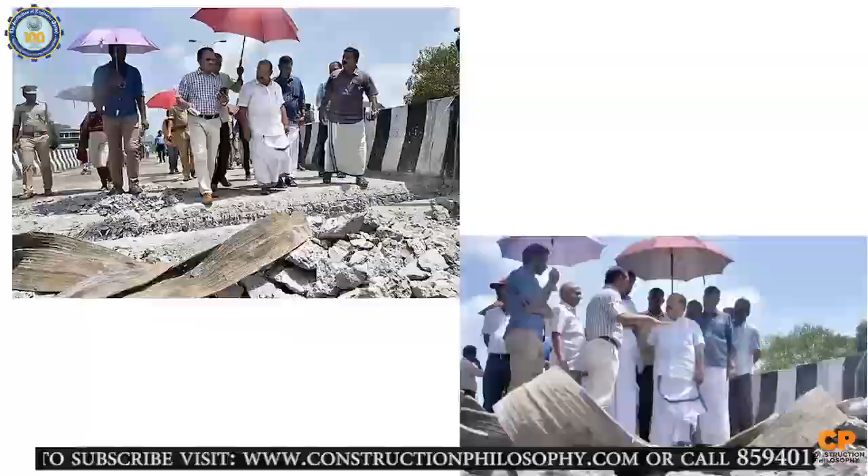What went wrong? When it was decided that the building is happening, the structural members of the Association of Structural Engineers were also debating and discussing that. The design was done from Bangalore, and we checked up with the agencies - those quite known in the country, who have designed more than 100 bridges across the country, a quite capable team doing that work. Our structural engineers were quite curious about what was going on, so we went in and studied that.

This was the guidelines for design of continuous bridges as per SP 66 2005. Later on, this particular system was removed. The continuous deck system is what they did in order to prevent that expansion gap. They stitched the top portion of the two girders.

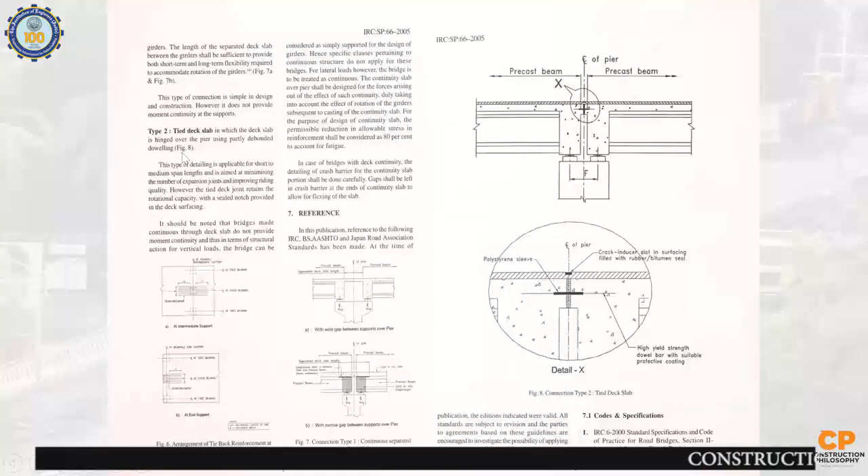So this is one girder which is independent, and this is the second girder. Only the surface connection is made to have a tied deck slab. This is the tied deck slab in which the deck slab is hinged over the pier using partially debonded dowelling. So this is where the connection was made and how the system happened.

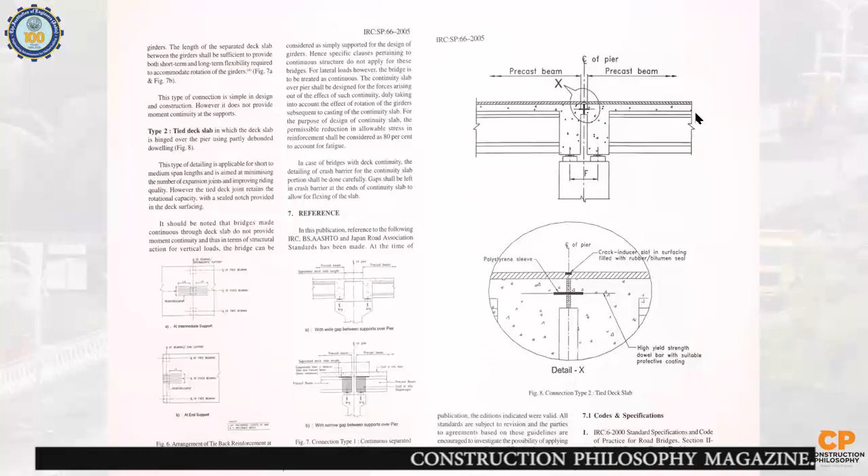Once they have done that, what happened? The expansion will not be getting arrested at one pier to another pier, so it will start moving. And since the bearing provided - here you can see this lap splice tension part was provided - so this is stitched together.

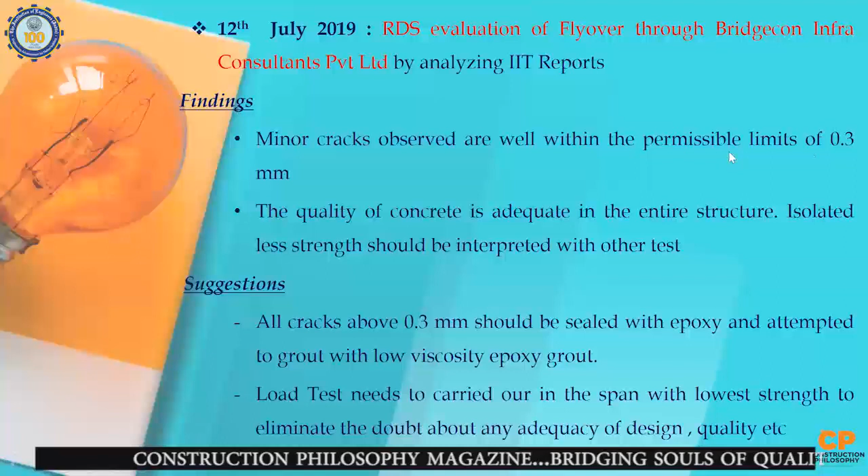RDS evaluation of the flyover through Bridgecon Infra Consultants was done by analyzing IIT reports. The finding was that minor cracks observed are well within the permissible limit of 0.3 mm. The quality of concrete is adequate in the entire structure. Isolated less strength should be interpreted with other tests. All cracks above 0.3 mm should be sealed with epoxy and attempted to grout with low viscosity epoxy grout. Load tests need to be carried out in the span with the lowest strength to eliminate any doubt about adequacy of design, quality, etc.

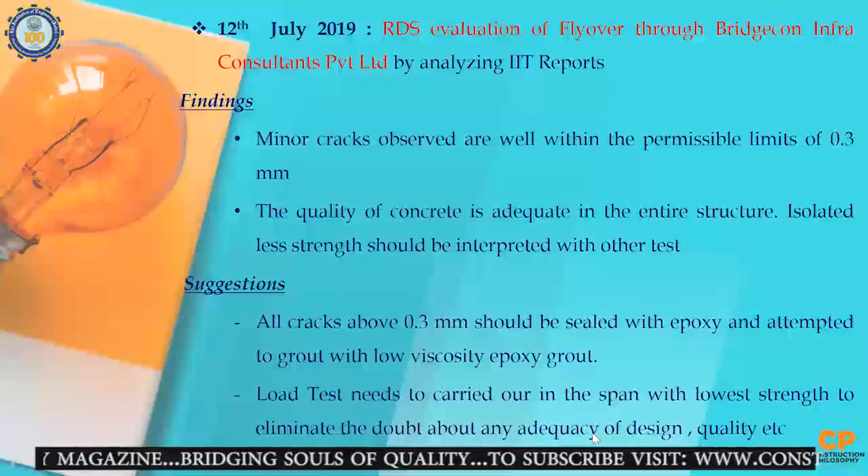The state government conducted a discussion between IIT Madras and Dr. E. Sreedharan, and the final decision was taken to demolish the flyover and get it reconstructed through an independent contractor. This is where we are coming into the picture. The members of the Association of Structural and Geotechnical Consultants were keeping in touch with what was happening, studying to collect the details.

We went in, conducted detailed evaluation and site visit along with bridge engineers from STUP Consultants. Cracks formed are random. Distress cracks are not flexure or shear cracks. We went through the document.

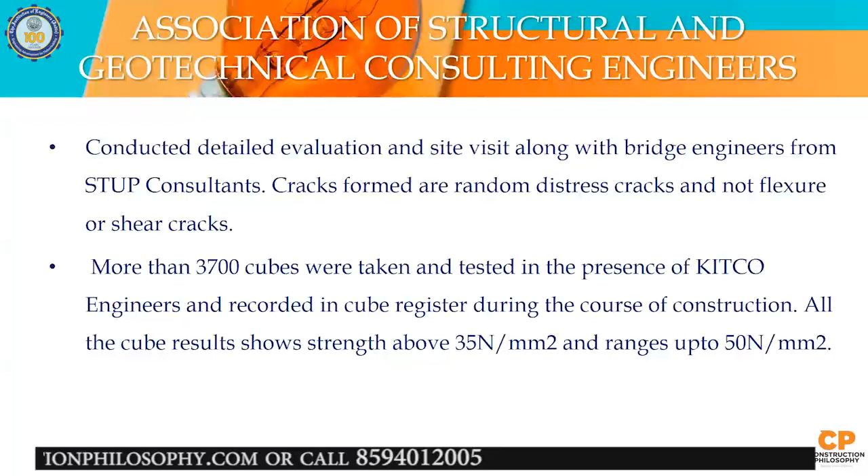More than 3,700 cubes were taken and tested in the presence of KITCO engineers and recorded in the cube register during the course of construction. All the cube results show strength above 35 Newton per mm square and ranges up to 50 Newton per mm square. Rectification works worth 2.63 crores already completed as per the direction of IIT Chennai team.

We went through the records, and we have suggested in other cases also that load test has been adopted in similar situations, especially KSTB tested the Neelimangalam bridge and found it to be safe.

Basic engineering assessment errors were found in the report submitted by Dr. Sridharan, where they stated that a pulse velocity test value of 4 km per second was interpreted to have only M10 grade strength. There was no test actually conducted by Professor Dr. Sridharan and team. It was based on the test result conducted by IIT Chennai.

Cost of rebuild and associated nuisance to public life has to be considered. Environmental pollution during demolition will create further damages. Loss of carbon footprint and wastage of resources has to be taken into account before a final decision is made.

We felt that many retrofitting methods such as plate bonding, external post tensioning, carbon fiber wrapping, jacketing, etc. can be adopted for rectification if required. So the decision of demolition should be the last option, adopted only if safety is at threat. A load test is essential before taking a decision to demolish the bridge.

As per the meeting, it was decided that the bridge has to be demolished and reconstructed with an independent contractor, converting RCC to PSC. It was decided that demolition will happen on October 2nd, and from October 3rd onwards the work will begin. On September 25th, we did a press conference.

We told that based on all this study, we don't feel it is right to demolish the building without doing a load test. So we approached the High Court and got a stay order. The High Court directed that, since so much work had already been done, a load test must be conducted before doing anything further.

The government went for an appeal against that in the division bench. The division bench carried the matter. We presented all the technical data and wanted an engineering solution. So the engineering solution was more important than whatever the other factors were.

We presented the case and argued that a load test is essential before we take the decision of demolishing, and if it can be rectified at a cost, as per the final report of IIT, the additional cost will be about 7 crore rupees only.

Including all the additional structuring that was suggested, they said they will go for jacketing and other aspects. Even though the initial estimate was only 4 crores and already 2.3 crores was done, even if you do the entire job, the cost will be only 7 crores as per the IIT estimate.

Why should we demolish the entire bridge? To reconstruct it again, we'd have to spend another 20 crores and another 2 years of time for the public, which is not fair without doing a load test. So we went with that and got a favorable verdict from the division bench of the High Court.

Instead of doing the load test, the government has gone to the Supreme Court. The case is right now pending there, and in fact we are also arguing on that.

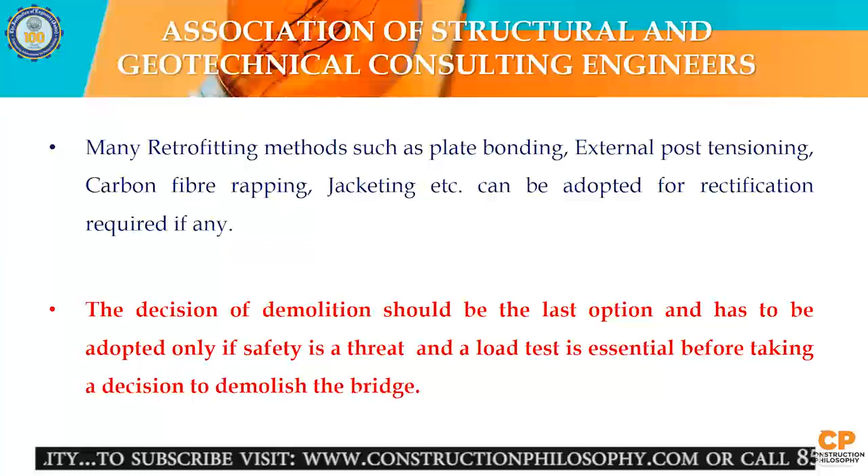And if something can be rectified, why should we destroy it? That is the entire idea of the Association of Structural and Geotechnical Consultants, backing this to make sure that if it is not needed, let us not do that. So every problem has a solution. Sometimes it just takes a long time to find it.

Even if it is right in front of your nose. And with that, I would like to conclude and open it for the interactive section.